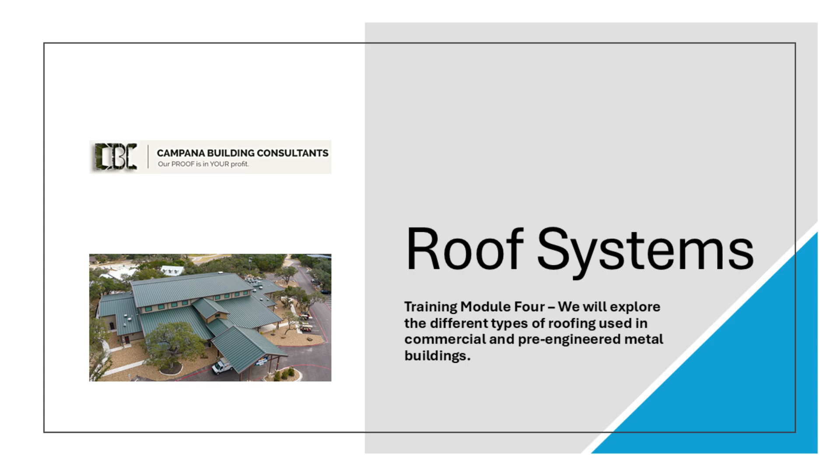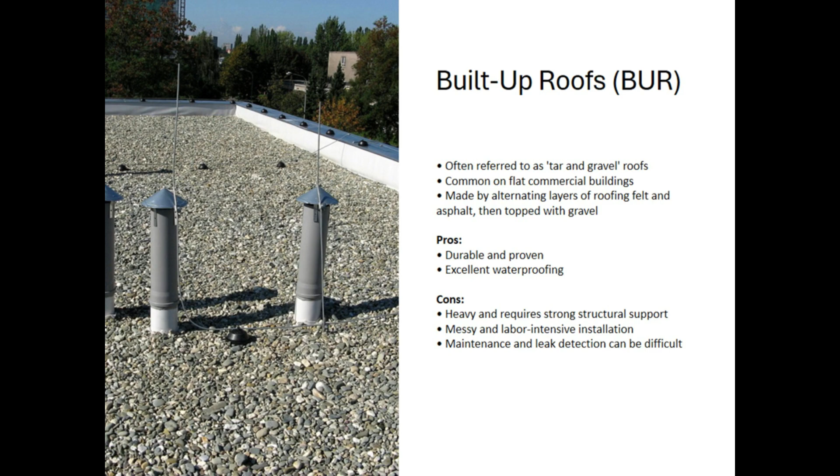Let's get started with built-up roofs, often called BUR or tar and gravel roofs. They're most commonly used on flat commercial buildings. The system is made by layering roofing felt and asphalt, then topping it with gravel. BUR roofs are durable and provide great waterproofing, but they're also heavy, messy to install, and tough to inspect or maintain. They require a strong structure underneath to support the weight.

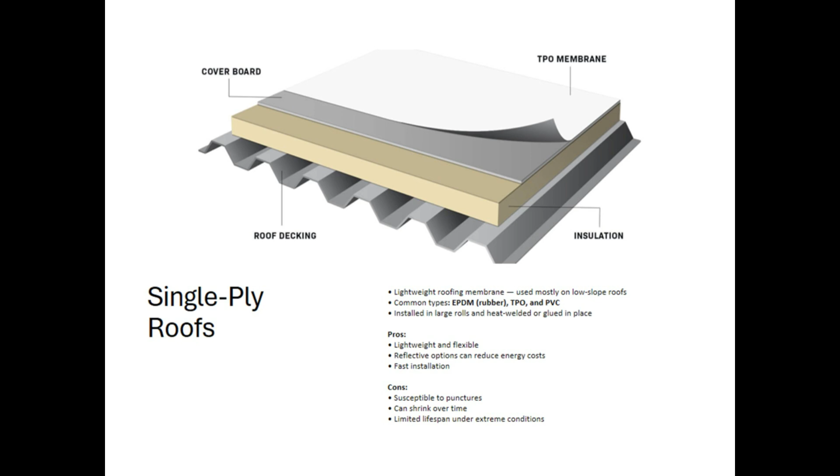Single-ply roofing systems are popular for low-slope commercial roofs. They come in large rolls and are heat-welded or glued in place. Common types include EPDM, which is rubber, as well as TPO and PVC membranes. These roofs are lightweight, fast to install, and often reflect heat, which can lower energy costs. However, they can puncture easily and may shrink or degrade over time, especially under harsh weather conditions.

Metal roof systems are the most common choice for pre-engineered metal buildings. They're typically made from factory-coated steel panels, which are attached directly to purlins using fasteners or clips. Metal roofs are extremely durable, often lasting up to 50 years or more. They resist fire, mold, and pests, and require very little maintenance. That said, they can be noisy during storms and need good insulation to prevent condensation. And like all roof systems, precise installation is key to keeping them watertight.

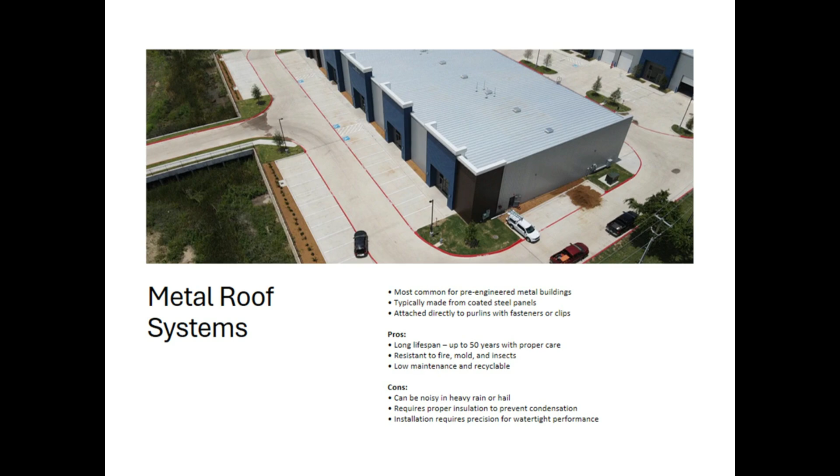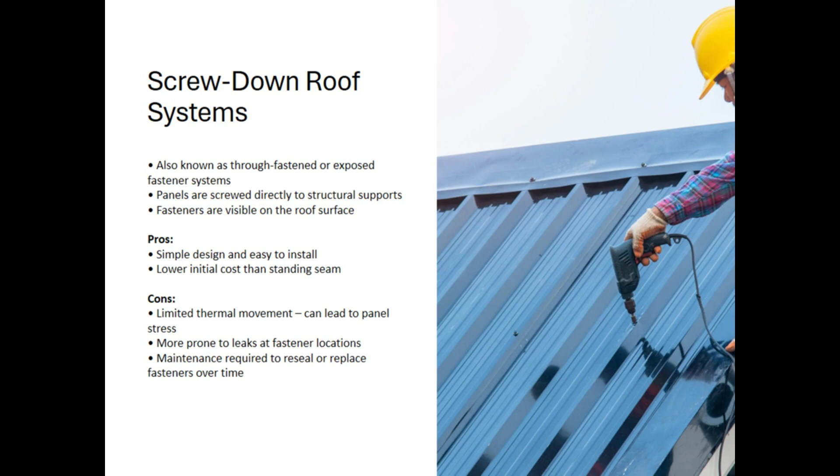Screw-down roofs are also known as through-fastened or exposed fastener systems. The panels are screwed directly to the roof structure, and the fasteners remain visible on the roof surface. This system is simple, cost-effective, and easy to install. However, because the panels are fixed in place, there's little room for thermal movement. That can lead to stress or even warping over time. Also, since the fasteners penetrate the panels, they can become leak points, and usually require maintenance to reseal or replace fasteners.

Standing seam roof systems use a concealed fastener design, with raised seams that interlock between panels. These panels are installed with clips or a floating system, which allows them to expand and contract with temperature changes. Standing seam roofs have a clean, modern look, excellent weather resistance, and long-term durability. But they do cost more than screw-down roofs, and the installation requires experienced crews to ensure proper performance.

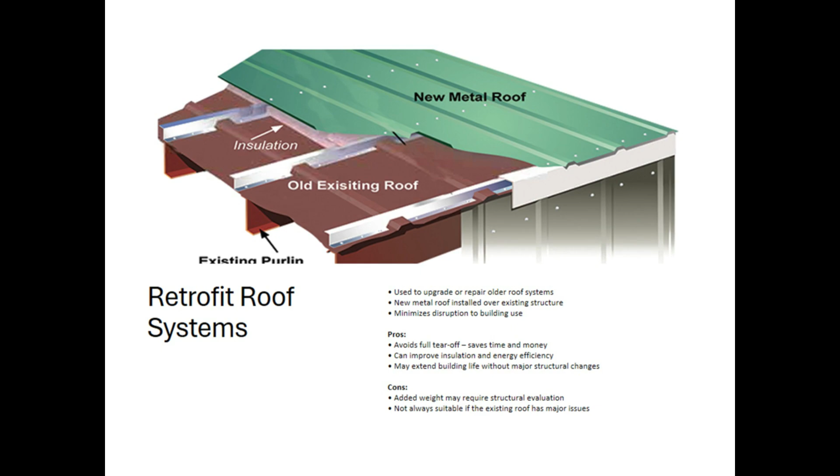Retrofit roof systems are designed to upgrade or extend the life of an older building. A new metal roof is installed directly over the existing structure, which avoids a full tear-off and keeps the building in operation during the process. Retrofits can improve insulation, enhance energy efficiency, and extend the lifespan of the facility. But keep in mind, the added weight may require a structural evaluation, and if the existing roof has major damage or design flaws, a full replacement may still be the better option.

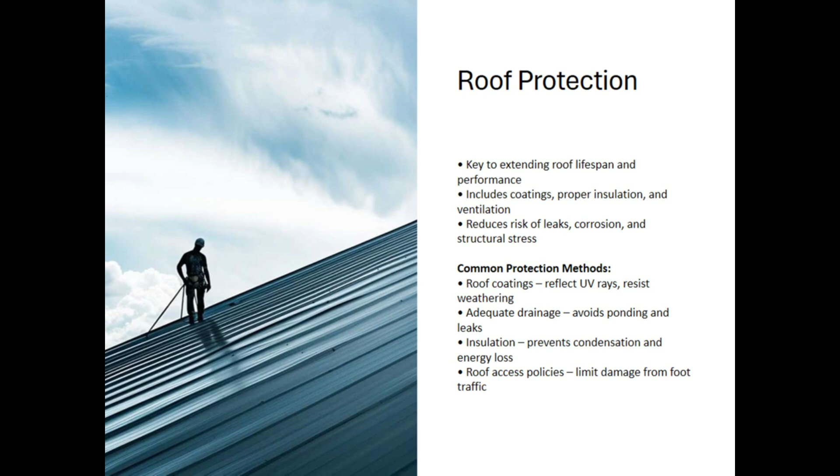Protecting the roof is one of the smartest investments a building owner can make. This includes coatings, insulation, and proper ventilation, all of which help reduce leaks, corrosion, and long-term stress on the structure. Coatings can reflect UV rays and slow weathering. Proper drainage prevents ponding and water intrusion. Good insulation stops condensation and energy loss. And limiting rooftop foot traffic with access policies helps prevent accidental damage.

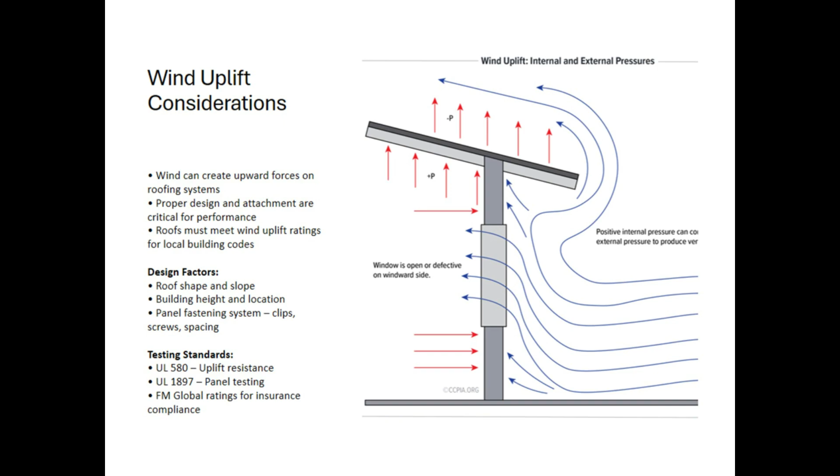Wind uplift is one of the most critical performance factors for any roof system. Strong winds create pressure differences that can lift the roof upward, so proper design and attachment are essential. Things like roof slope, building height, and geographic location all affect uplift risk. That's why fastening systems, including clip types and screw spacing, must meet code requirements. Common testing standards include UL 580 for uplift resistance, UL 1897 for panel testing, and FM Global ratings for insurance compliance.

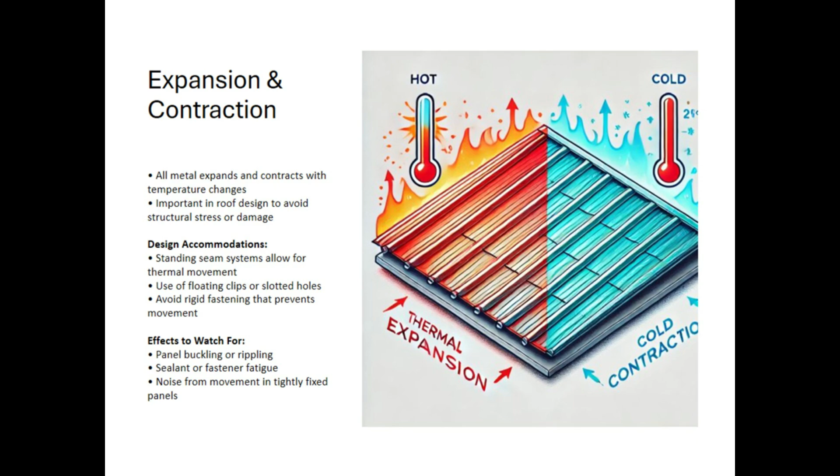Metal roofs naturally expand and contract with changes in temperature. If the roof isn't designed to accommodate that movement, it can lead to panel distortion, sealant failure, or even structural damage. Standing seam systems are ideal because they allow movement through floating clips and slotted holes. But when panels are rigidly fastened, the stress can cause buckling, rippling, or even noise. Always be sure thermal movement is considered in both the design and installation.

Let's begin with the R panel. This is one of the most widely used screw-down roof panels in the metal building industry. The R panel features a trapezoidal rib profile with ribs spaced 12 inches on center. It's fastened directly through the panel into the roof purlins using exposed screws.

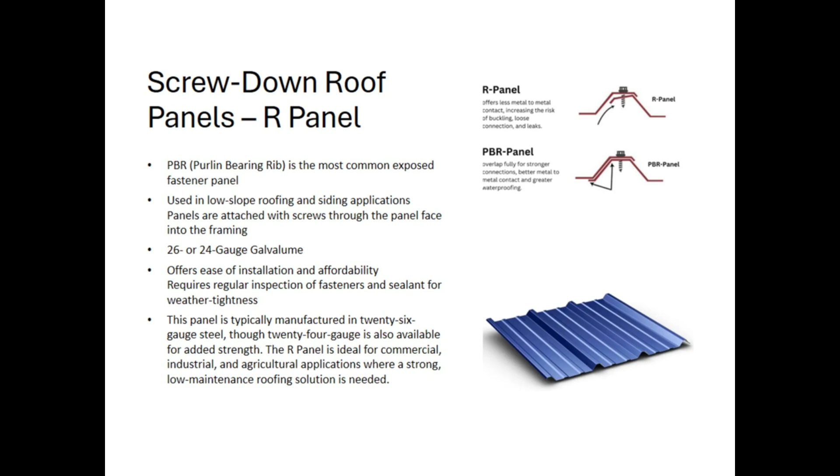That means it's simple to install and very cost-effective. This panel is typically manufactured in 26-gauge steel, though 24-gauge is also available for added strength. The R panel is ideal for commercial, industrial, and agricultural applications where a strong, low-maintenance roofing solution is needed. It offers good weather resistance and is available in both Galvalume Plus and Signature 200 color finishes with a standard 20-year finish warranty. The R panel is not recommended for very low slope applications unless special care is taken with sealants and installation. If you're looking for value and ease of installation, the R panel is a solid choice.

Now let's dive deeper into the R panel by highlighting its features and benefits. First, the R panel offers 36 inches of coverage, which makes it fast and easy to install. The die-formed ridge cap helps speed up erection even more, and because installation can start at either end of the roof, it gives you flexibility in how you work.

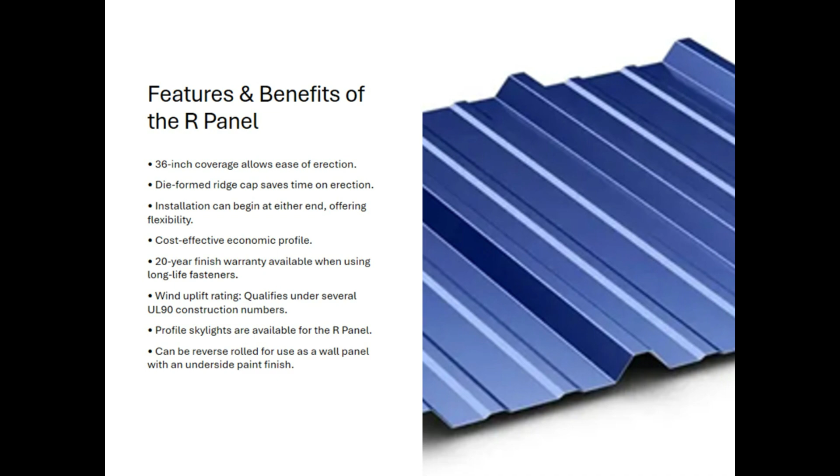Its economic profile means it's one of the most cost-effective panels out there. It comes with a finish warranty and offers a 20-year lifespan when paired with long-life fasteners. In terms of performance, the R panel qualifies under multiple UL 90 construction numbers for wind uplift resistance. Skylights are available that match the R panel's profile, giving you options for natural lighting. Finally, it can be reverse rolled, with the paint finish on the underside, so it can be used effectively as a wall panel too. This combination of performance, versatility, and value makes the R panel a proven performer in the field.

Next, let's take a look at the U panel. This panel is similar to the R panel in how it's installed, but it features a lower rib height, giving it a smoother, more subtle profile. The ribs are spaced 6 inches apart, and the panel is attached directly to the purlins with exposed fasteners. It's commonly used in light commercial and residential applications, especially when a clean, refined appearance is preferred.

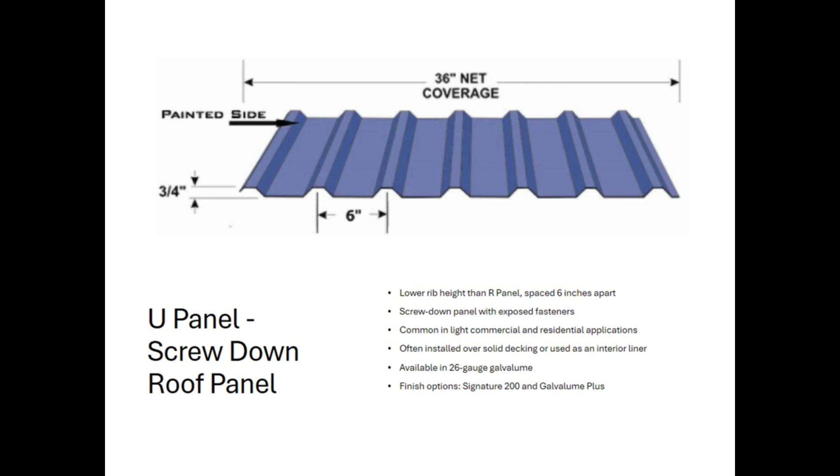U panels are often installed over solid decking, making them ideal for retrofit projects, or as interior liner panels. They're typically manufactured in 26 or 29 gauge steel and are available in Signature 200 finishes, or Galvalume Plus. If aesthetics are a priority and cost needs to stay in check, the U panel is a solid, attractive option.

Now, let's talk about the PBR panel, a widely used and highly versatile panel in metal building construction. This purlin-bearing rib panel is most commonly used for roofing, though it can also be installed as a wall panel. Its deep ribs create a strong shadowed appearance, and the flat area between ribs is reinforced for added strength. The PBR panel is manufactured in 26-gauge steel with a standard maximum length of 45 feet. Longer lengths can be provided on special request.

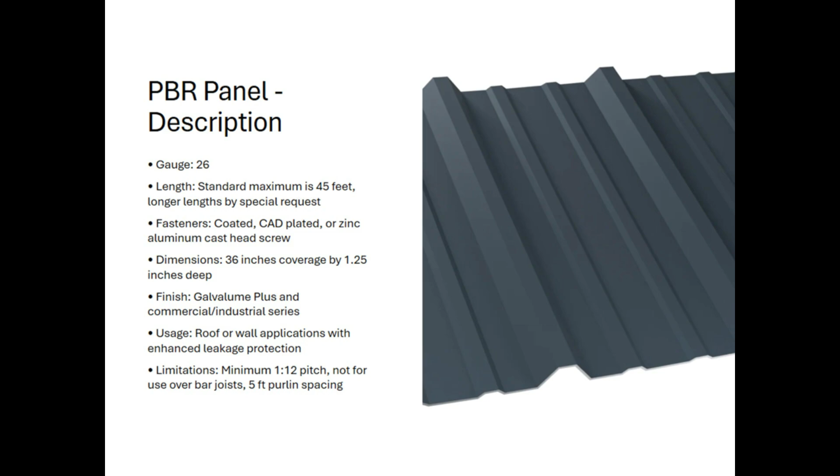It uses standard coated fasteners, CAD plated, or zinc aluminum cast head screws. The panel covers 36 inches in width and is 1 1/4 inches deep. It's available in both Galvalume Plus and our durable commercial and industrial color finishes. The PBR panel offers better leakage protection than a standard R panel, thanks to its extended purlin-bearing leg, and it's recommended for roof slopes of 1 in 12 or greater. Keep in mind, it is not designed for use over bar joists or for rigid secondary structures. It is most effective with purlins spaced 5 feet on center.

Here are some key features and benefits of the PBR panel. First, the panel's 36-inch coverage makes installation quick and efficient. The die-formed ridge cap saves time during erection, and you can start installation from either end of the building, which adds flexibility. It has an economical profile, making it cost-effective, and it's backed by a finish warranty, with a lifespan of up to 20 years when paired with long-life fasteners.

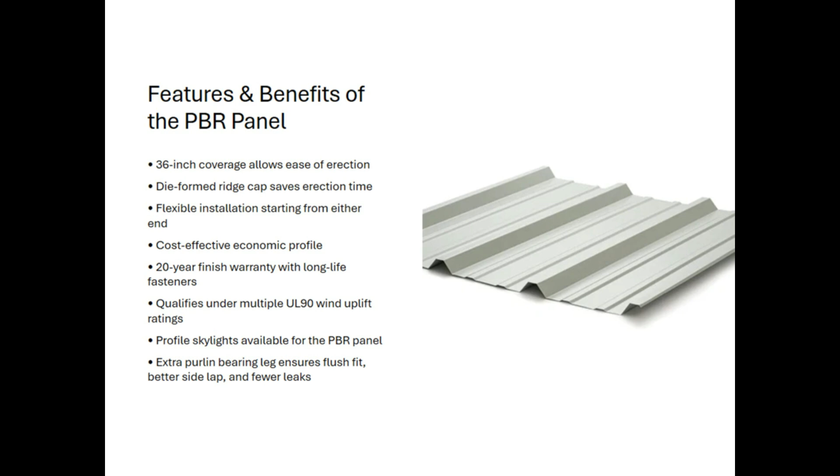It also qualifies under several UL 90 construction numbers, meaning it's been tested for wind uplift and proven reliable. You can get profile-matched skylights with this panel, and thanks to the extra purlin-bearing leg, you'll get a flush fit at side laps, leading to better connections and fewer leaks. All of these features make the PBR panel a top performer in both roof and wall applications.

AVP panels are a great choice when appearance matters. They have a more architectural profile than standard screw-down panels, making them ideal for commercial projects where the roof is visible to the public. The panel includes intermediate minor ribs between the main ribs. This design not only improves the look, but also adds extra strength and rigidity to the panel.

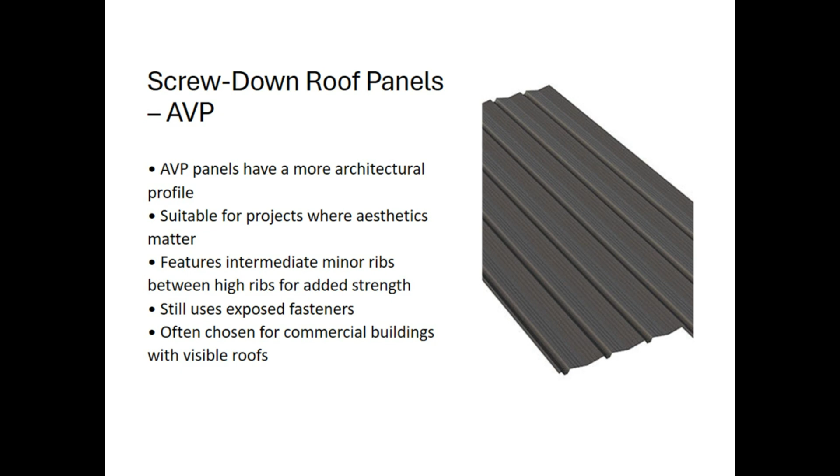AVP panels are still installed with exposed fasteners, but their smooth and refined appearance makes them a preferred choice for offices, showrooms, or retail buildings. If you're looking to blend structural performance with great curb appeal, the AVP panel is a solid option.

Let's now look at standing seam roof panel systems, a premium choice in metal roofing. CBC offers two main standing seam options, the BattenLok and the DoubleLok panels. While screw-down roofs are the most economical option, a standing seam roof may be required in cases where roof slope is 1/2 inch in 12 or less, or when long-term durability and performance are critical.

Standing seam systems come with several key advantages. First, a unique floating clip design. These clips allow the panels to move freely with temperature changes, expanding and contracting, without stressing the panel. They're also self-centering, ensuring movement in either direction.

Second, leak protection. Because the only panel penetration happens outside the building envelope, at the eave, these roofs are virtually leak-proof. Third, they're ideal for retrofits. These systems can be installed over existing roofs with minimal disruption to business operations. Additional insulation can also be added, lowering energy costs.

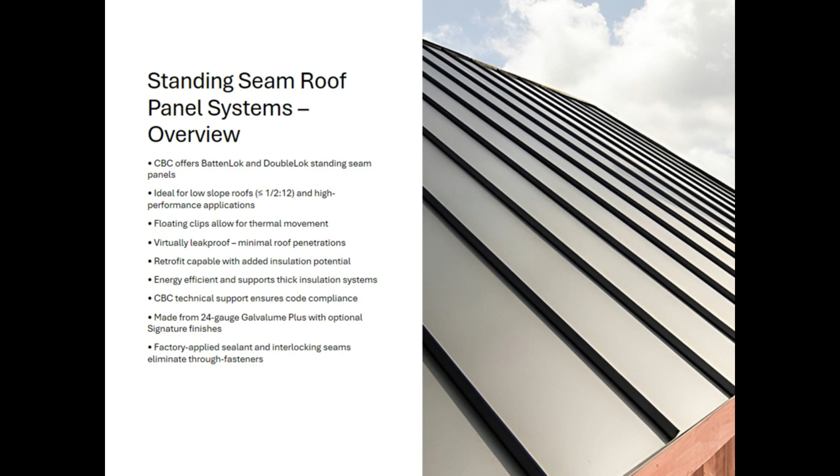Fourth, energy efficiency. Standing seam roofs allow for thicker insulation systems, thermal breaks, and lower operating costs across the life of the building. Fifth, CBC's technical team provides engineering and design support, ensuring compliance with AISI specs and other industry standards. Sixth, material longevity. CBC standing seam panels are made from 24-gauge Galvalume Plus with an optional Signature 200 or Signature 300 paint finish. Let's take a closer look at the DoubleLok panel.

DoubleLok is a 24-inch wide mechanically seamed standing seam panel with a 3 1/16 inch high rib. The seam design ensures a tight fit with a locking assembly for weather resistance. It's made from 24-gauge Galvalume Plus steel with an option for a Signature 200 or 300 painted finish. A 20-year warranty is available.

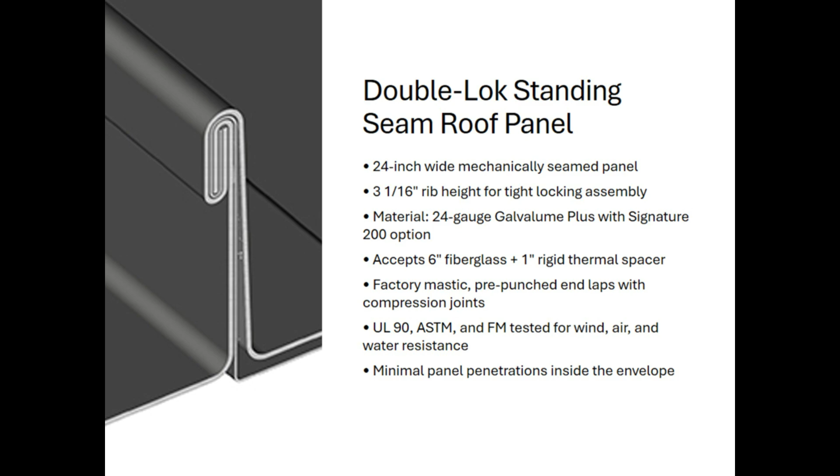This panel can accept up to 6 inches of fiberglass insulation, along with a 1-inch rigid thermal spacer, making it highly energy efficient. Factory-applied mastic, pre-punched end laps, and compression joints ensure a tight seal and minimize on-site labor. It's UL 90 rated, ASTM, and FM tested for wind uplift, air infiltration, and water penetration. DoubleLok offers excellent strength, energy efficiency, and weather tightness, all with minimal penetrations.

Now let's move on to the BattenLok series. BattenLok is an 18-inch wide, mechanically seamed standing seam panel with a 2 1/16 inch seam. A 16-inch wide option is available on request. It's made from 24-gauge Galvalume steel and comes standard in our Signature 300 finish with an optional 20-year warranty.

The BattenLok panel accepts up to 6 inches of blanket insulation plus 1-inch rigid thermal board. The panel spans up to 5 feet and can be installed over open framing or solid decking. This flat panel includes vertical striations to reduce oil canning, and clips are concealed to maintain a sleek appearance.

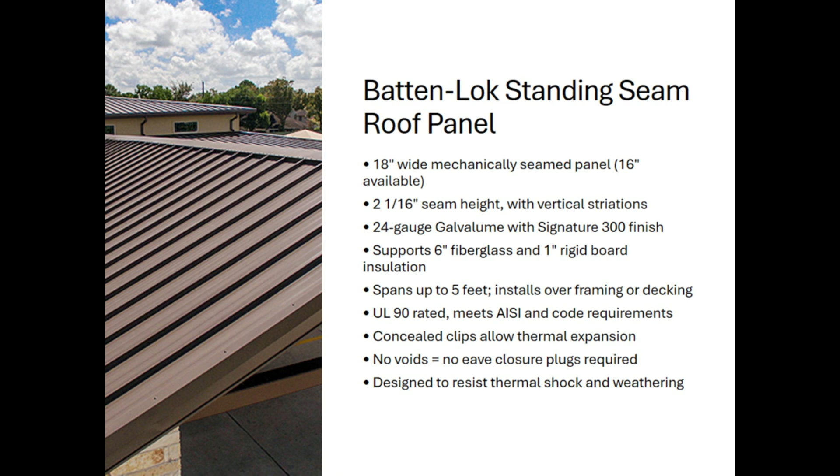It's UL 90 rated for wind uplift, meets AISI specs, and is ideal for low-slope roofs of 1/2 inch per foot or greater. With easy mechanical seaming, strong expansion capabilities, and a high-end aesthetic, BattenLok is a top-tier choice for both structural and architectural applications.

When talking to customers about roof systems, always start by understanding their needs and application. Focus on long-term value, like durability, energy efficiency, and maintenance savings. Point out upgrade options such as standing seam roofs or protective coatings. Don't oversell. Instead, clearly explain the pros, cons, and total value of each option. Also highlight important topics like warranty coverage and code compliance. Your goal is to guide them to the right solution, not just the most expensive one.

Let's wrap up Module 4 with a quick review of roof systems. Screw-down roof panels like the R, PBR, U, and AVP panels offer a cost-effective solution with quick installation and strong performance. Standing seam roof systems, including BattenLok and DoubleLok, are designed for long-term durability, superior weather tightness, and thermal movement.

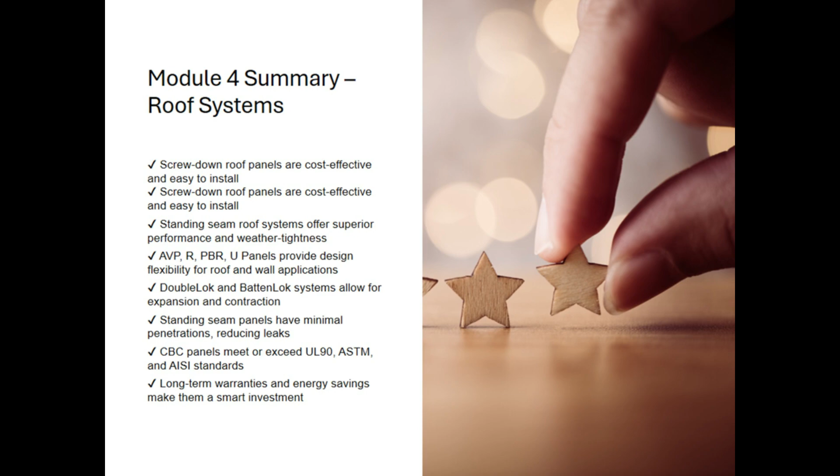With minimal penetrations, factory-applied sealants, and UL90 wind uplift ratings, these systems help reduce leaks, lower energy bills, and meet stringent industry codes. Add to that CBC's engineering support and long-term warranty options, and it's easy to see why CBC roof systems are trusted across commercial, industrial, and architectural applications.

Let's review what you've learned in Module 4. This self-test will reinforce key concepts related to roof systems. For each question, listen carefully, and after a brief pause, the correct answer will appear. Let's get started.

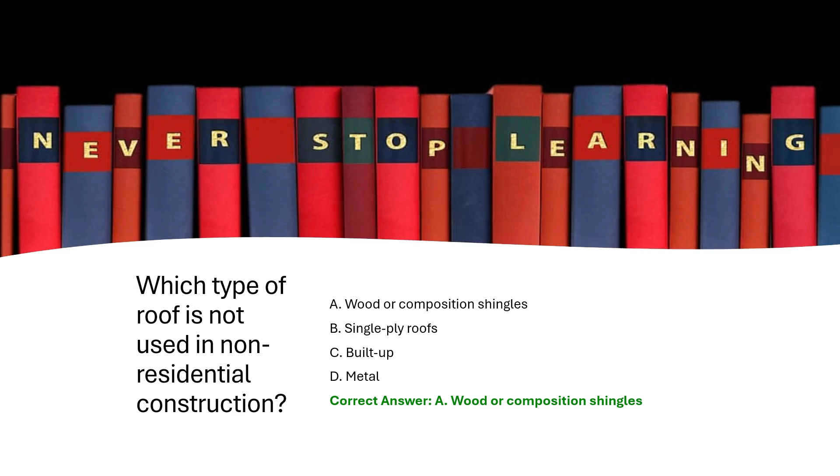Question 1. Which type of roof is not used in non-residential construction? Is it A, wood or composition shingles, B, single-ply roofs, C, built-up, or D, metal? The correct answer is A. Wood or composition shingles are common in residential applications, not in commercial projects.

Which of the following is not a disadvantage of a built-up roof? A. Built-up roof is not fire-safe. B. Initial investment is generally reasonable unless a tear-off is required. C. Maintenance is frequent and expensive. D. Trouble spots are hard to detect. The correct answer is B. A reasonable initial investment is actually one of its advantages.

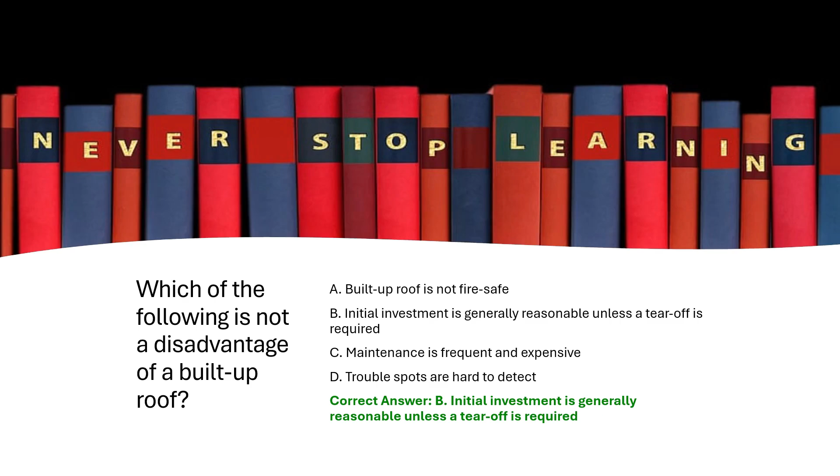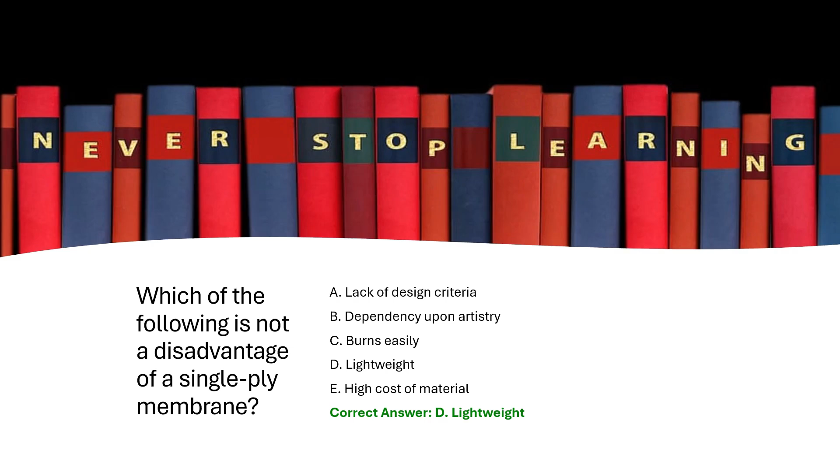Question 3. Which of the following is not a disadvantage of a single-ply membrane? A. Lack of design criteria. B. Dependency upon artistry. C. Burns easily. D. Lightweight. E. High cost of material. The correct answer is D. Lightweight is actually a benefit, not a drawback.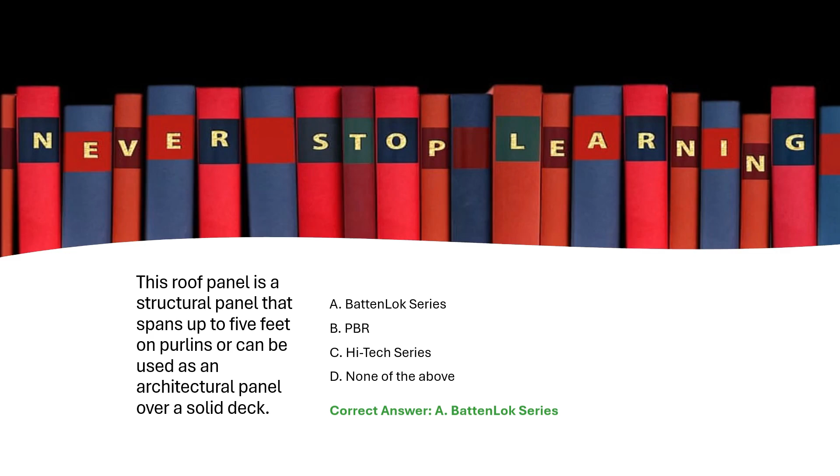Question 7. This roof panel is a structural panel that spans up to 5 feet on purlins or can be used as an architectural panel over a solid deck. A. BattenLok Series. B. PBR. C. Hi-Tech Series. D. None of the above. The correct answer is A. BattenLok is versatile and spans up to 5 feet.

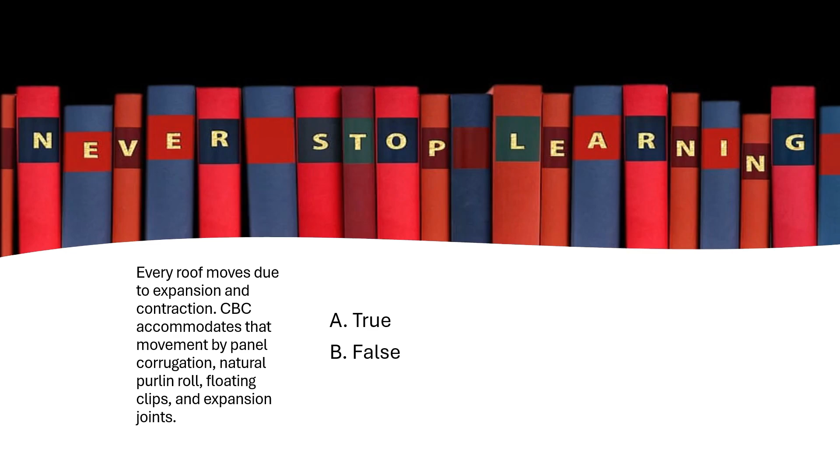Question 8. Every roof moves due to expansion and contraction. CBC accommodates that movement by panel corrugation, natural purlin roll, floating clips, and expansion joints. A. True. B. False. The correct answer is A. CBC roof systems are designed to handle movement.

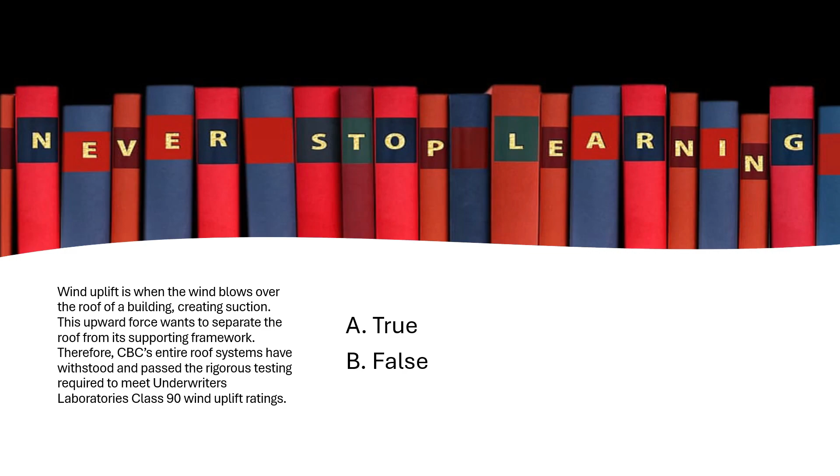Wind uplift is when the wind blows over the roof of a building, creating suction. This upward force wants to separate the roof from its supporting framework. Therefore, CBC's entire roof systems have withstood and passed the rigorous testing required to meet Underwriters Laboratories Class 90 wind uplift ratings. A. True. B. False. The correct answer is A. CBC systems meet UL Class 90 for wind uplift.

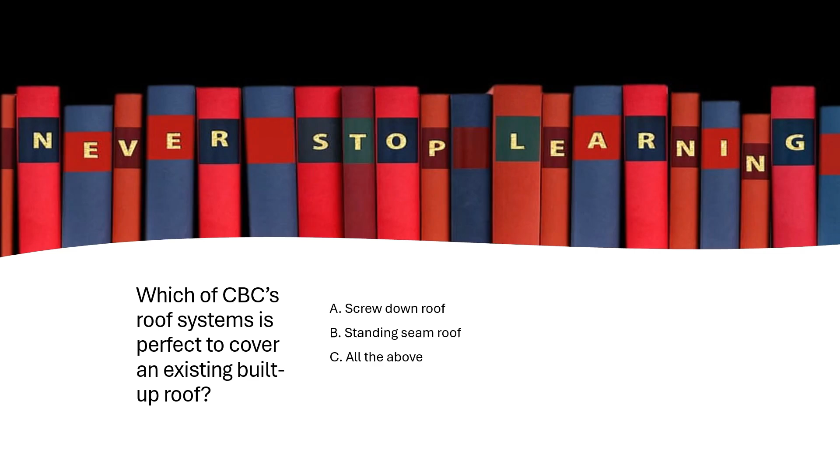Question 11. Which of CBC's roof systems is perfect to cover an existing built-up roof? A. Screw-down roof. B. Standing seam roof. C. All the above. The correct answer is B. Standing seam roofs are ideal for retrofits over built-up systems.